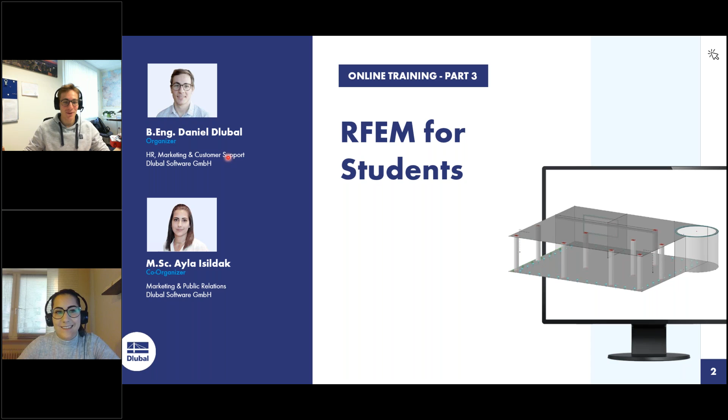So I guess we can move on, right? Yes, thank you, Ayla, for that short introduction. So let's skip to the next slide. For those who are visiting the training or this webinar for the first time, short information about GoToWebinar. We use this tool for our presentation of these trainings. First of all, here you can see you can show or hide your control panel. If you can't hear us, please adjust your audio settings, maybe adjust your speakers. And if you have any questions, you can ask them here in this text box.

And yeah, let's jump to this online training content. First of all, we model and design today a timber truss girder. The next part will be the modeling and design of a steel hall with concrete columns. And the last part of this training will be the design of a concrete building, which you see here on the right side. And these three projects we will do together. So I close my webcam. I jump to RFEM.

So now it would be interesting for me who is modeling also with me. So please put your hands up in this GoToWebinar tool. I think that should be possible, that I can see that someone is doing this. You can raise up your hands here in this GoToWebinar tool. Yeah. Some people are modeling with me, so I adapt my pace. Okay, good. Let's start with that.

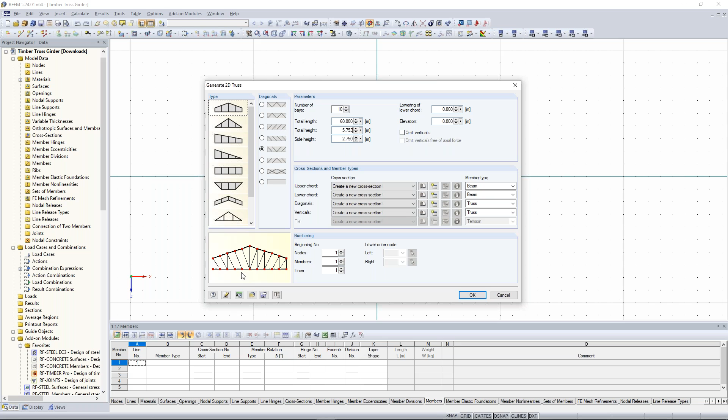My number of bays is 10, and the total length of this girder is 60 meters. And the total height at that point here in the middle is 5.75 meters. And the side height, so on the left or on the right side, is 2.75 meters. Good. Now I have to create new cross sections with the right material. So for the upper chord, for the lower chord, diagonals and verticals.

So for that, for the upper chord, I don't know the right pronunciation, sorry for that. I choose a new cross section. I think the right word is chord. So yeah, I guess so. It's chord. Okay, thank you.

Thank you, Ayla. So I create a new chord and I choose here a rectangular section because we want to create a timber chord. So I click here on that icon, and my parameters for the width is 220 millimeters, and for the height it's 520 millimeters, so 52 centimeters and 22 centimeters. Now important is that we choose here the right material, and here you see I just have the concrete and the steel, but we want to have here also a glulam timber.

So we have to create a new material, and here we create this new material when we click on this material library. So I choose here timber, and this mask jumps to the normal timber materials.

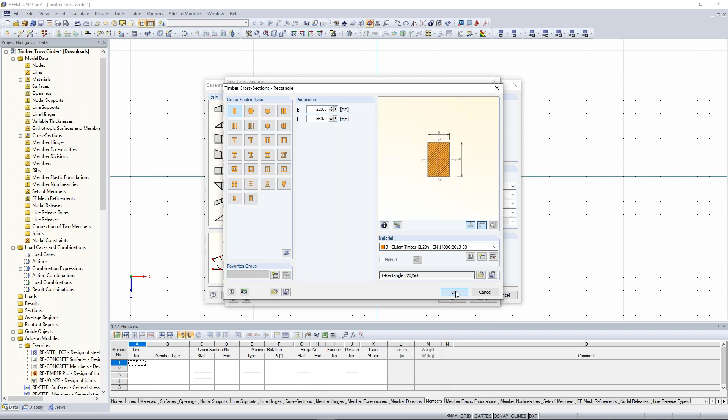And you see here the upper chord has changed to this cross section. So let's do the same thing for the lower chord, for the diagonals and verticals. For the lower chord, I choose also a cross section, but in this case 220 and 560. And material is the same. Now I can copy here this cross-section description with Control key and pressed C key. Click on OK.

And I create a new cross section for the diagonals. And now I copy here this thing and choose here the right material and change here the cross section to 200 and 200. So we have a quadratical cross section here. Click on OK. And now the same thing for the verticals. And here we have a cross section of 200 and 180. Also material glued laminated timber.

So now on the right side, you see the different member types, beam and truss. Where is the difference? Beam can transfer all typical internal forces like bending moment, normal and shear forces, and truss is a member type that has hinges on the end of a member, and therefore you can transfer only normal and shear forces, no bending moments. So keep that in mind. I click on OK, and you will see here this truss girder.

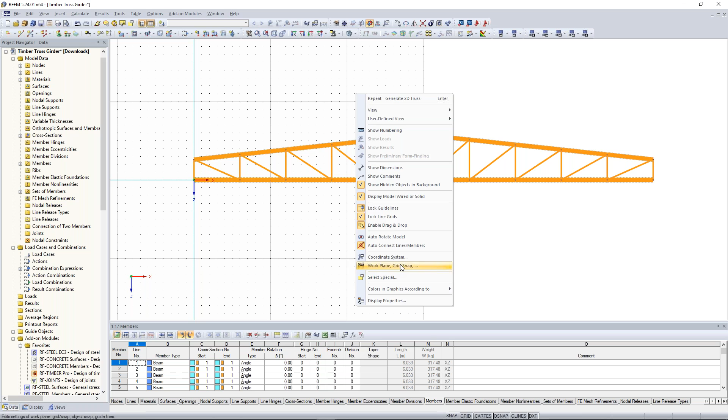So the next step is that I want to adapt my grid to the size of our model. For that I right-click, and I can choose here work plane, grid, snap. And here I have the possibility to adapt my grid according to size of model. When I click on that, you will see that the whole grid system adapts to the whole size of my model. And this makes, in my opinion, the overview of the whole model and project a lot easier.

So the next step is that we delete here the left members and the right members, because I want to create here a support, single support. So I draw a selection window from the right to the left side, and the same thing on the right side. And then I can right-click here and say delete. Now these 2 or 4 members were deleted.

And now a very important point, because I want to transfer here also some forces, that we change here these diagonals to the member type beam. So I select this diagonal, press the Control key in order to add something additional to the selection, press this diagonal, then double click with the left mouse button. And now I change the member type to beam. Good. I click on OK.

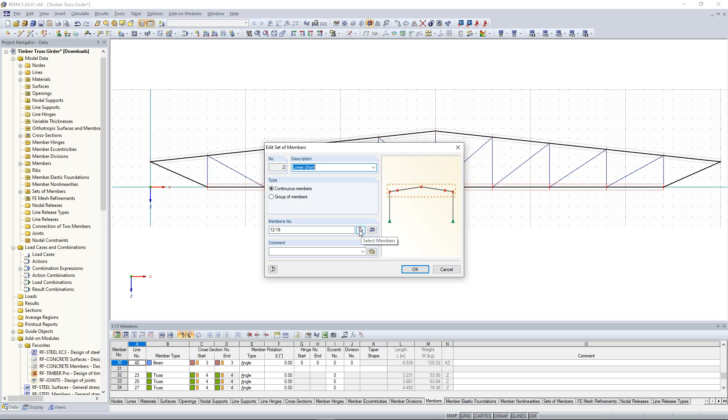And when I change here on the menu symbol bar the display model to a wireframe display model, you see here this set of members. Set of members: when you want to summarize some members, you can use the function set of members. And I want to add these members to that set of members. Therefore, I double click on this set of members, and I add here these additional diagonals. For that, I click here on this icon, select members, click on those diagonals, click on OK.

And you will see here this set of members. So you see this program created this set of members automatically by generating this 2D structure. And this will help us later when we want to add some loads.

Good. The next point is that we add here some single supports. So we select this node through this selection window, and after that we click here on the symbol bar, new nodal support, and this support should have the type hinged. And on the right side we have another support, and this should be a support which carries only vertical forces. So I move this selection here on UX away, so that we just activate the vertical forces, similar to sliding in X direction.

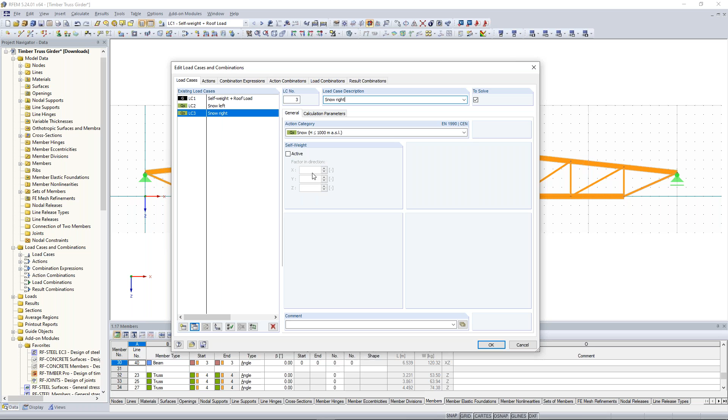And I want to consider the snow loads once on the left side and once on the right side. So for that, I click here, I enter here left. Then I can easily copy this load case by clicking copy selected load case and create new. And here I change the name from left to right. And the last load case is wind and suction, because we want to consider also a suction wind load case here on this upper chord. Okay.

Important thing is here, because we activated on this basic data at first that we want to create these load combinations automatically, several registers open here, and we have additional options. Like here for the snow, for me it's important that the acting of the snow action is simultaneous. That means that both load cases can combine with each other. So no one excludes each other. We will see that later on that load combination. I click on OK.

And now I can create here the loads. So for that, I can click here on New Member Load. And now, because we have this set of members, we can refer to them. Just click here on Sets of Members, and then the load parameter is 2.5 kilonewton per meter, and I relate to the true member length, because we have here an inclined member. So for self-weight, it's important to select here this option, global related to true member length. I click on OK.

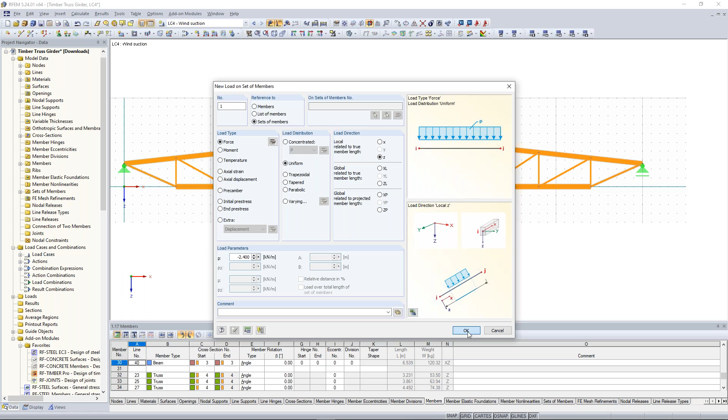Good. Next load case, wind suction. So I want to create wind loads. For that, clicking here again on member load. Again I refer to sets of members. And now an important point, I want to refer to the local axis of my members. And because we have suction loads, I have to enter a negative load parameter. The load parameter is here minus 2.4 kilonewton per meter. I click here on that upper chord and the creation of our loads is done.

When you want to know the local axis of one of these members, no problem. Right-click one of the members, select local axis system of members on, and you will see here the local axis coordinate system of the members. Good. I deactivate this again because I know my system. And now we can calculate this.

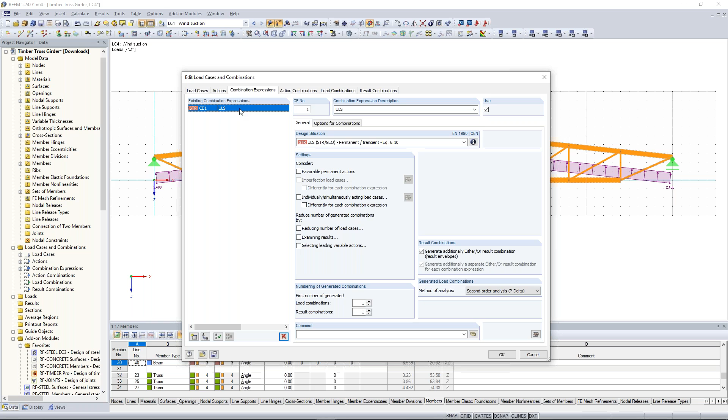And now go to the load cases and combinations again. Click here on load cases and combinations, and look for the combination expressions. Here you see the ultimate limit state and also the serviceability state. For this easy and simple design of this truss structure, I don't need these serviceability combination expressions. So I select them all by holding the Shift key and delete them. I'm just interested in the ultimate limit state because in this case it's more important.

I jump to the next register, action combinations, and here you can see the different action combinations with the leading load case, by this combination value 1.5, and here also the other leading load case. In this case, we have the wind load case as the leading load case.

The load combinations we can see here. I think this is pretty clear. And as I said before, we have activated in the register actions both load cases of snow, and this means that they can act together. And this is important to know, because when we activate here at the snow action alternatively, this would mean that both snow load cases would exclude each other. Good. I click on OK. And now I can say, okay, calculate all, please.

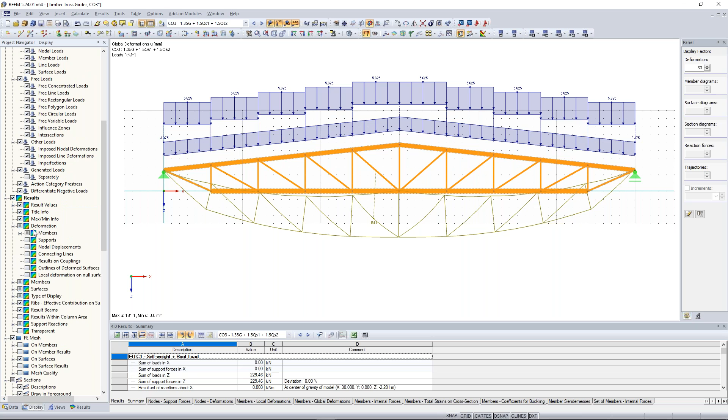And after that, let's watch the results of this girder, of this truss girder. The calculation will take some time. I think that's pretty clear. And here we can see the deformation. We can display the deformation a little bit nicer. Just click here on the display navigator, go to results, and click here on the area deformation, members, and cross-section colored. Good.

But I have more interest in the internal forces. And for me, very important, and now you can see it, the bending moments aren't so important at that truss structure. You see it here. There are some bending moments, but they are not very high. But when we look to the normal forces, they are very high. Look at that here, 900 kilonewton. This is really much. And here again, compression forces in this upper chord, 900 kilonewton. This is really much.

And I think there will be a little problem of that small member diagonal, 600 kilonewton as tension force. I think there we will have some problems, but we will see it after the design of that member in the timber design. Good. So now let's come to the design of this timber structure.

For that, I jump to the data navigator, and when you scroll down, you will see here our add-on modules. These add-on modules enable you to design almost everything according to some standards. So with the normal RFEM, you can calculate all structures, but if you want to design something, you have to use our add-on modules. And because we have here a timber structure, I have to use RF-TIMBER Pro. You will find it here, somewhere there. I can add some add-on modules as a favorite one, and they will be here. And now I click here on RF-TIMBER Pro. So this enables the design of timber structures or of timber constructions.

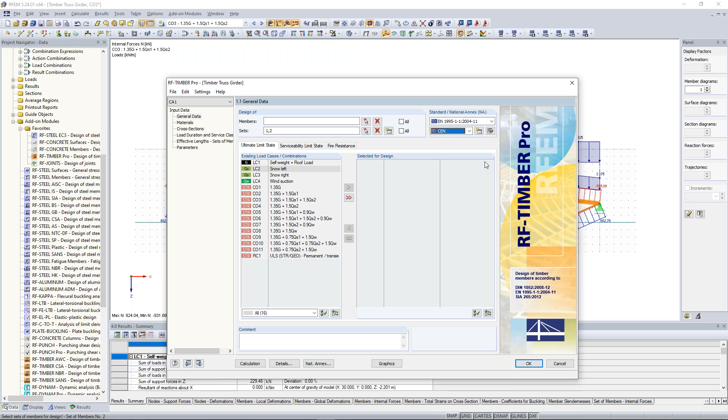If you want to see more details concerning some values here, you can see it here by clicking on that icon, and here you have some additional information of how they calculate some limits and some designs. Good. Now important, I have to select the right combinations or result combinations for my design. I decide here to design my load combinations. I choose here every load combination and transfer it to the right side. Select it for design. I just design here for the ultimate limit state. We don't need any serviceability limit state.

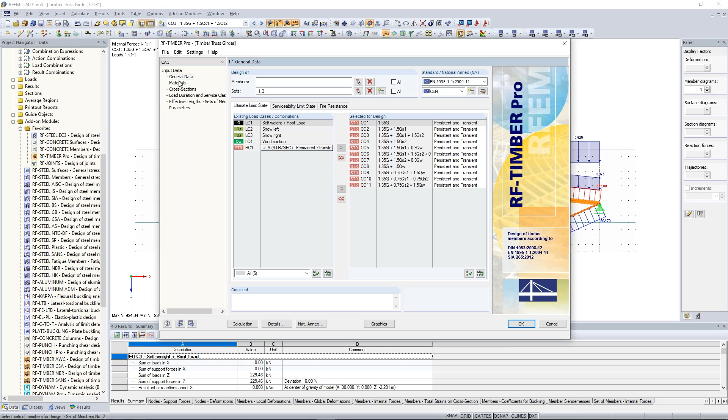Good. Now jump to the next window, and here we see the material timber for the design. Here we can see some material properties, characteristic strength for bending, for example, or for tension, compression, and so on. Let's jump to the cross sections. Here we can see some cross sections which will be used for the design. And here, additional note 7, no member with this cross section is selected for design, because we just design here the upper and the lower chord, and the verticals aren't selected for that design, because we can create here after that several cases for our design, but we do that later.

Now, important point, load duration and service class, especially for the timber design. And here we can see it. Self-weight and roof load is permanent, and our snow load cases are short-term, so the load duration class is important for the timber design. And here we have also the service class. I decide here for service class 2, and so we have here some additional information for service class 2.

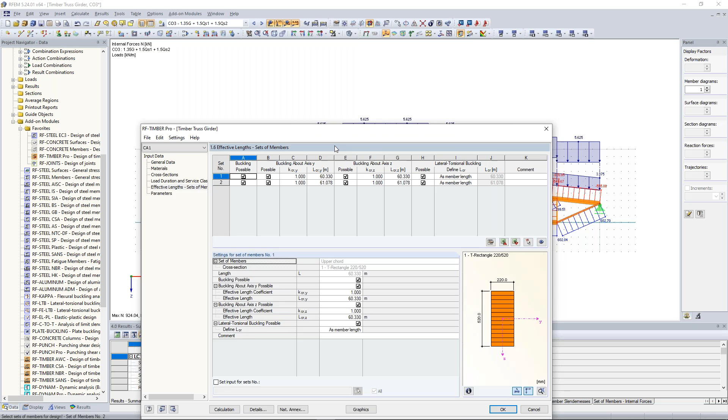And now I assume that my upper chord is fixed enough due to additional members out of the plane. So I assume that this is fixed enough, so I say that no buckling is possible for the upper chord.

And for the lower chord, you see we have just tension forces, so no stability design will be necessary, because we have to consider stability only if we have compression forces. The only compression forces you will see here in this upper chord. So for tension forces, we don't need to consider any buckling or torsional buckling, so I don't select here anything.

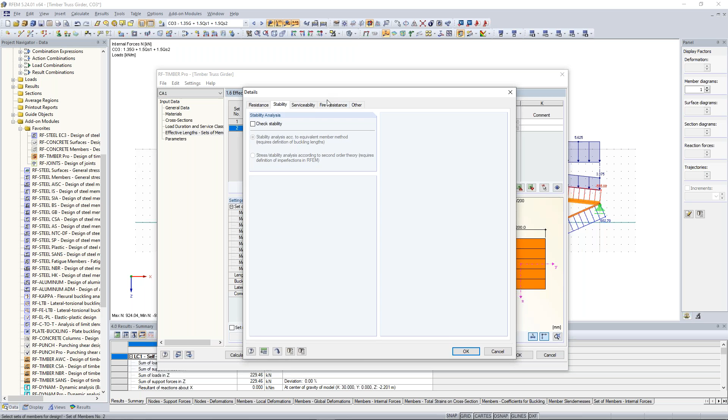I can do the same thing when I click here on details. And when I jump to the stability register, I can say, okay, please don't consider any stability because I know my upper and my lower chord are fixed enough, or the stability wouldn't be important here. Same solution.

Parameters, I can add additional parameters here, but in this case this isn't so important. So how can I calculate this?

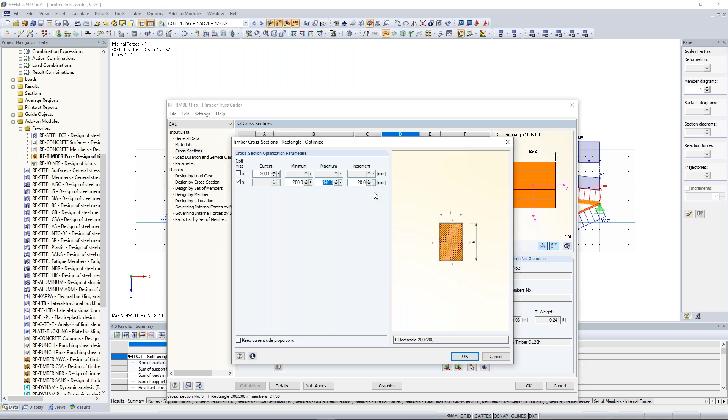And now you can say what you want to optimize. I want to optimize the height of this cross section, so I click here on height. The width should be the same, just the height. And I know the height can start at the minimum of 200 and the maximum of this height should be 440, and the increment of these steps should be 20 millimeters.

I click on OK, then I click again on the calculation, and now you see the designs are good enough. At that moment, the design ratio of the new cross section is 200/220.

Good. Now it's important that you transfer also this new cross section to export it to RFEM. Export cross section to RFEM, click yes, because now it's important to calculate the whole structure in RFEM again, since we have new stiffness here. So calculate everything again.

Okay, now let's go to the results of our add-on module, RF Timber Pro. And here we can see the max design ratio is 0.99. This is very good.

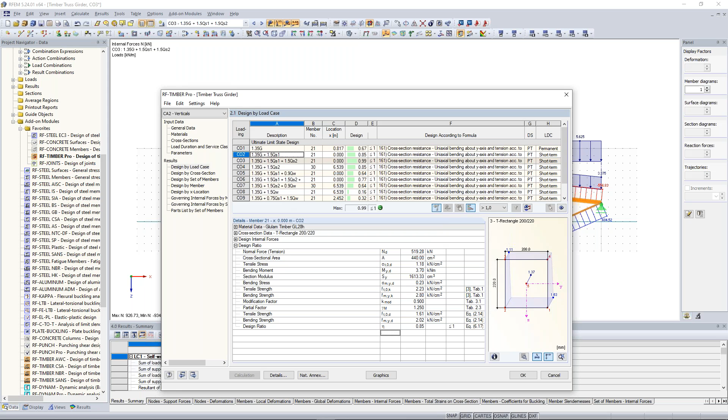I select the members for the design, and now I can click here every vertical manually, or use a smoother way of selection. Here in the symbol bar, I have the option to select special objects in RFEM. I click on that, and now I choose here, I activate this member.

Scroll down and say okay, parallel to member. Now I choose this one member, click OK, and you will see all members are selected parallel to that first member. I click OK, and these selected members were transferred here to that part. So again, I choose here my load cases for the design.

I go to materials. I think this is now pretty clear. Cross sections and so on. Effective lengths. Oh sorry, here I have to select the service class to 2.

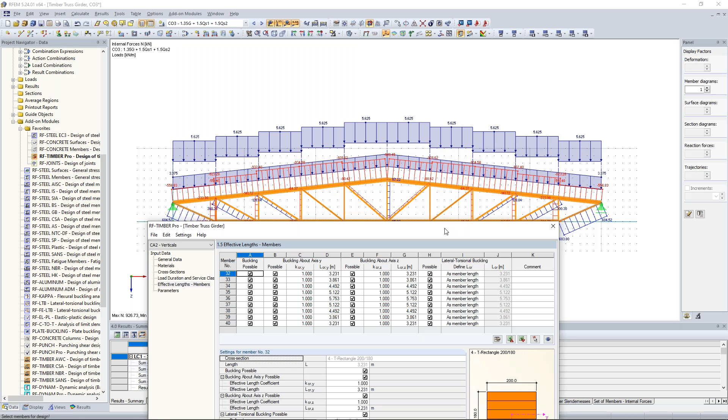Yeah, also for the lateral torsional buckling, so the inputs of this length are enough, and I can say okay, calculate. And again I see, okay, all designs are fulfilled. Good.

Now the last case is the design of the diagonals. So new case, diagonals. Click on OK. And again I choose here the right members for the design, and I want to design here this member, the diagonals. Now it's, as you can see, a little bit hard to select them because clicking at the same time is a little bit hard.

So I use here my view navigator, and I want to display them by different cross-section types. So members by cross-section. And now I decide here for the T rectangle, 200 by 220, and I choose here these members. Click on OK.

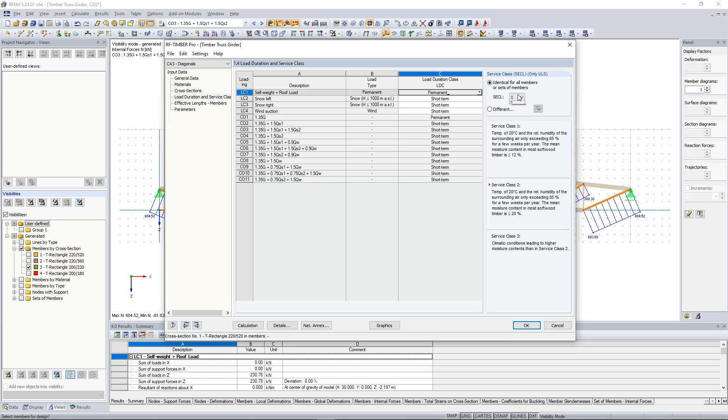Jump to the next window, materials. I think here is pretty everything clear. Cross section, also here is everything correct. Load duration class, yeah, the same things here again. Maybe the service class, change here to 2.

Effective lengths. Again I suppose here the member length as the buckling length, because I say okay, out of plane and in plane should be the same as the member length, because I suppose here this Euler case 2, and I say calculation, and all proofs are fulfilled, are correct under the design ratio of 1.

And yeah, this was the very easy design of this timber truss structure. We can also watch the different design ratios graphically.

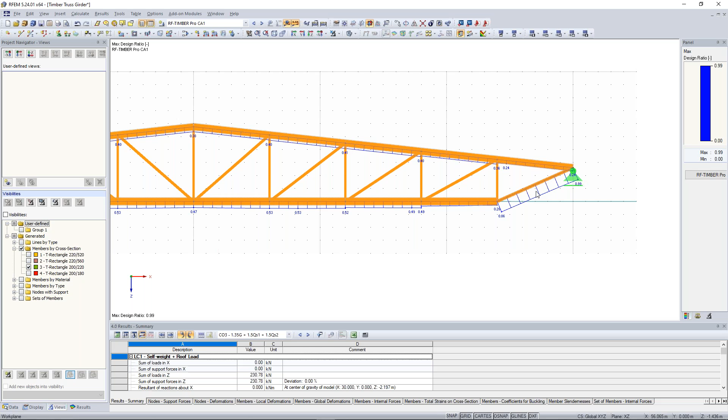So I click here to RF Timber, and here we can see the different design ratios. And yeah, as we supposed correctly, this diagonal here on the left and here on the right side has a very high design ratio in comparison to this normal lower chord. But I think that's pretty clear because here we have a smaller cross section, like here on this upper chord.

Jump to the next design case. So the verticals, and here the diagonals. Yeah, this was the design of this timber truss structure.

Good. Ayla, any questions or anything to show? What would be good? No, I think everything is fine and nothing special.

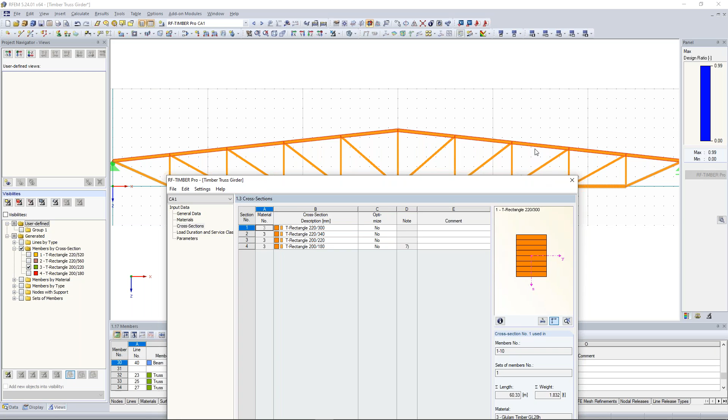Yeah, this is something you have to consider when you do this design, because when I say here okay, export all cross sections to RFEM, and I say yes, you will get higher deformations because now our structure is thinner, I would say. Yeah, you have smaller cross sections, so it's not so stiff as before, and you will pretty surely get higher deformation. Yeah, let's look at the deformation, maybe on that load case. What's that? Maybe this would be more interesting when you have just vertical loads.

And I remember that we have a deformation of 180 millimeters. And now we will get deformations of 260 millimeters, so 8 centimeters more. I don't know, this is also something you have to consider in your design.

Good. Anything else, Ayla? Not yet, no. Okay, we have one new question. Is it possible to have multiple sections for each member?

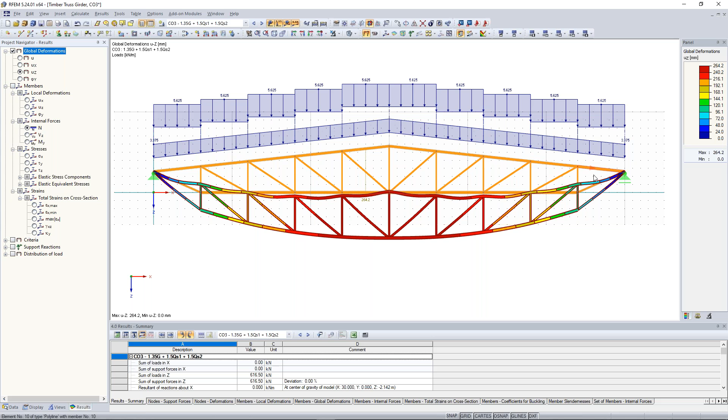Yeah, that's possible, but you have to create more cross sections for different members and put them into the design. So I can, but we almost did here the same thing. We designed here for the upper chord a different cross section, for the lower chord a different cross section, for the verticals maybe you can optimize your construction.

For the verticals and the diagonals, because here you will get more tension forces. So you can say, okay, the first 2 rows of this diagonal can be a different cross section and put them then to the design.

But consider also the production in the factories of this structure. When you say please do every cross section different, the factory of this structure will say wouldn't it be more economically when we have similar cross sections? Yeah, this is possible, but also consider the production and manufacturing of this truss structure.

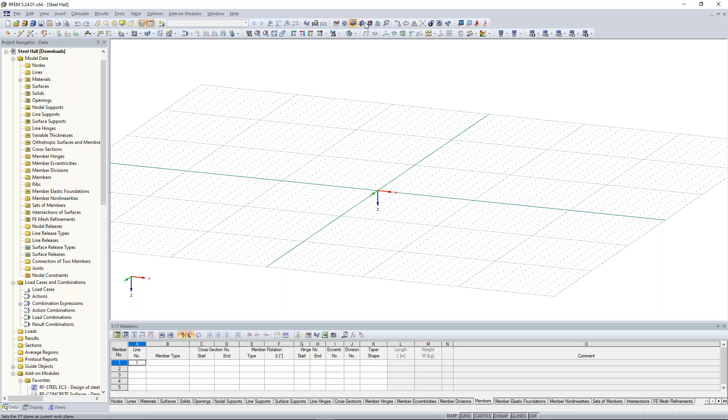Again, here we have the model type 3D. So we have here in that symbol bar, you can see it here, 3 different work planes. Now I click here on the work plane XZ because first of all, I want to create a 2D truss structure. Again, as before, click here on the menu bar, tools, go to generate models, members, and click here on 2D truss.

Yeah, now we have to create new cross sections, but I think that's known by now how this works. So I create new cross sections. The upper chord has a cross section of HEA 300. So here, click here, import rolled cross sections, HEA 300. And you see here the cross section description.

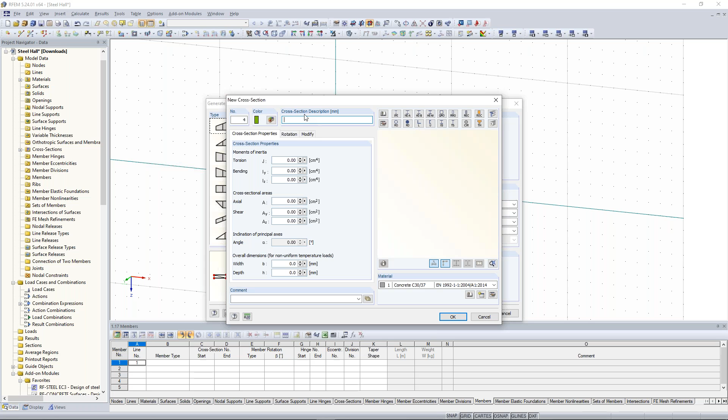And the verticals are HEA 160. Good. I click on OK.

And the next part is that I change these outer diagonals because I'm pretty sure that they will get more internal forces, especially normal forces. Therefore, I change here the cross section. I select them, double click on one of them.

And here I change the cross section to HEA 140. I choose here the right material, and click on OK.

Good. So now we have different types of cross sections. We can display them a little bit nicer. I can show you how it works. When you go to the display navigator and scroll down, you have here the possibility that you can color the graphics according to the cross section. And here we can see the different cross sections by different colors.

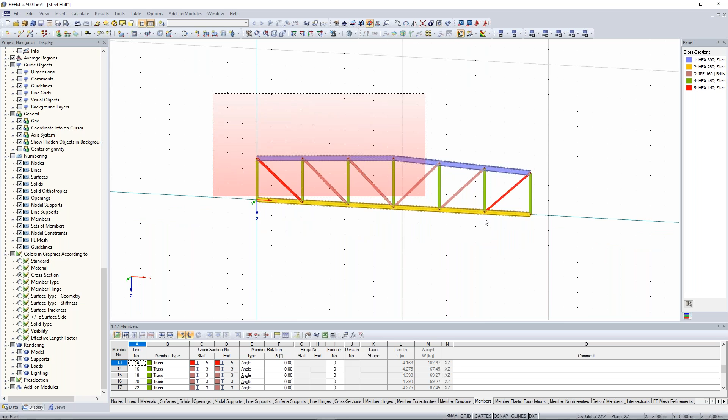Good. So next step is moving this truss 8 meters along the z-axis upwards. So select everything, right click, click here, move or copy. I just want to move it 8 meters high, so I don't have to enter here the number of copies. Displacement vector, remember our global z-axis is downwards, so when I want to move it upwards, I have to enter a negative value, -8.

So, the next part is that I delete these outer verticals because I want to connect a concrete column here. So I delete this outer member. Now I create a new column. For that, I click on the symbol bar, new single member.

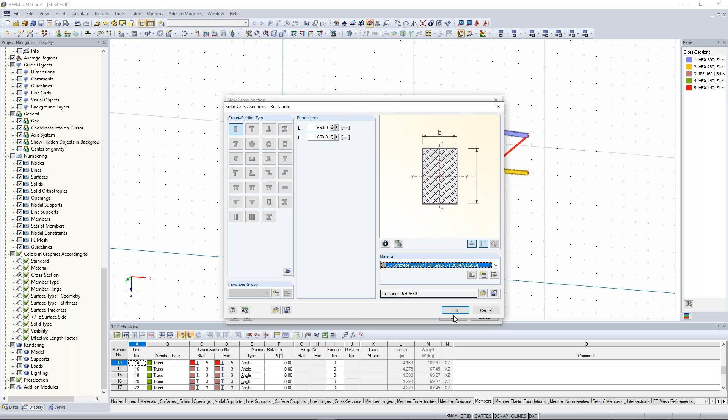I create a new cross section, rectangle and quadratic cross section, concrete C30/37 according to the Eurocode. I click on OK. Again on OK. And I start from the bottom to this corner node of this truss structure.

Now you can see I can't snap to these grid points because I didn't activate this. Here on the status bar, you can activate snap to grid. Now it's activated and I can snap to these grid points. Good.

Now I copy it easily by drag and drop by pressing the Control key on my keyboard. And because in this case they have the same colors, I change the color of my concrete structure to pink. So, nice. Good.

The next part is that I adjust some hinges. We offer two ways of inserting hinges. The first, and maybe this is not so well known, is that we can add hinges graphically. Therefore, go to the menu bar, Insert, Model Data, then Member Hinge, and then Assign to Members Graphically.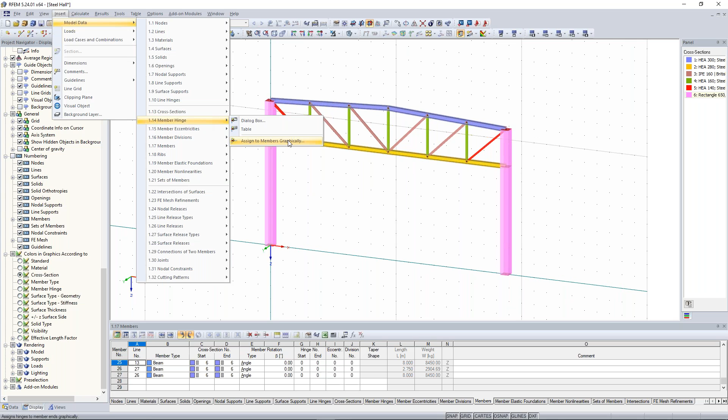As you can see, I want to connect this upper chord by a moment hinge on that concrete column. Therefore, I create a new hinge type and I activate the moment hinges. I can also do it by clicking on one of these icons, set rotational release MY and MZ. It's the same solution.

I click on OK, and now you will see blue nodes or circles. When I click in the middle of one of these members, the hinge will be created on both ends. And when I just click on one of the member ends, it will create the member hinge just at the end of this member. I do it on the left side and once on the right side. Click on OK.

I change the display model to the wireframe model, and you will see the hinges a little bit better. And the same thing we do for the upper chord. The other way of adding member hinges is to double-click one of the members and adjust the member hinge there.

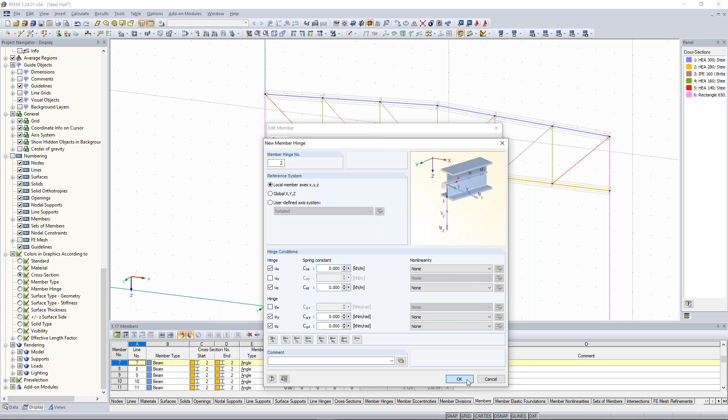And after the calculation, we can see that the tension forces in that upper chord are transferred through that diagonal into that column. Because when we have tension forces, this tension force will go along this diagonal and will be transferred as a compression force to this concrete column. I think that's pretty clear.

Then the right member. And here the same hinge, but at the end. Good.

The next part is that we check the self-weight of the structure and watch the internal forces, to see if this frame is modeled correctly. So for that, I also choose the lower nodes because we want to create some supports now. We have a rigid support here. This enables all moments and vertical and horizontal reaction forces.

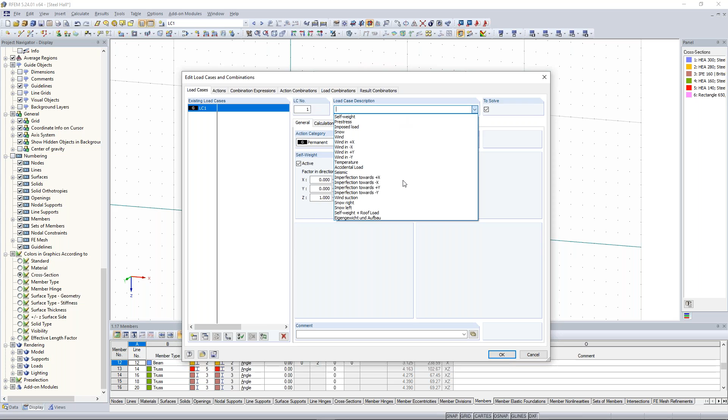Now I create a new load case. Self-weight, and I just activate the self-weight, click on OK. And now I want to see the results.

So, okay, here we see at first the deformation, but for me more important are the internal forces, to check if we modeled and entered the hinges correctly. So for that, I activate the internal forces. And here we can see it. Tension forces, because we have positive normal forces. Compression forces, yeah, simple truss structure. I think that's pretty clear.

And here we can also see that this tension force is transported through that diagonal into that concrete column. And now let's watch the shear forces. And here we can see at this hinge we have no additional tension forces, no normal forces. The same with the shear forces, you can see 0. And bending moments, again the same, 0 bending moment. On the right side the same.

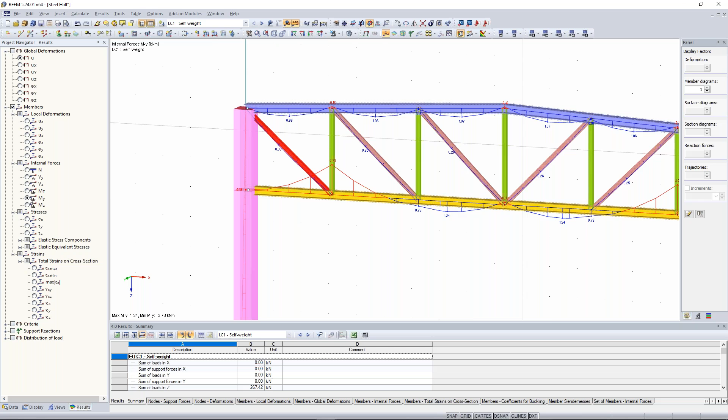Good. So I think we modeled it correctly. So let's continue with the other frames. Again, I want to adapt my work plane according to the size of my model. Now I want to copy it 2 times in the global Y direction. So I select everything, right click, move and copy. Number of copies is set to 2 and my displacement vector is in the global Y direction 9.5 meters.

Good. I change to the work plane XY. And now I want to add additional beams. Let's do that. New single member. And they get a new cross section, HEA 240. Material steel.

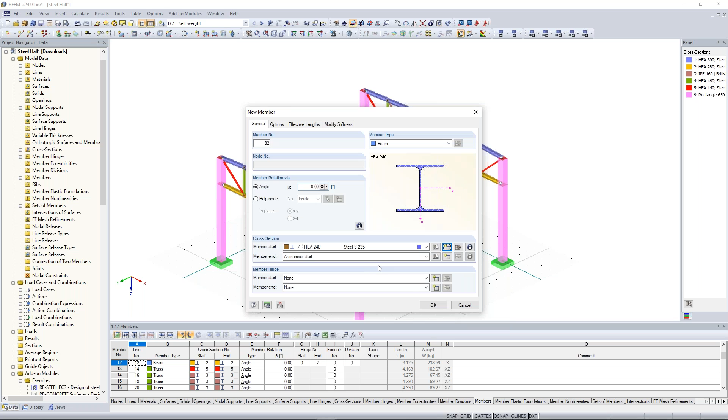And now I want to add some hinges on both ends, so they will be connected as a hinged beam, as a truss, we can say, because we have moment hinges on both ends. Okay, so let's do that. So, good. And the other nodes will also get new beams.

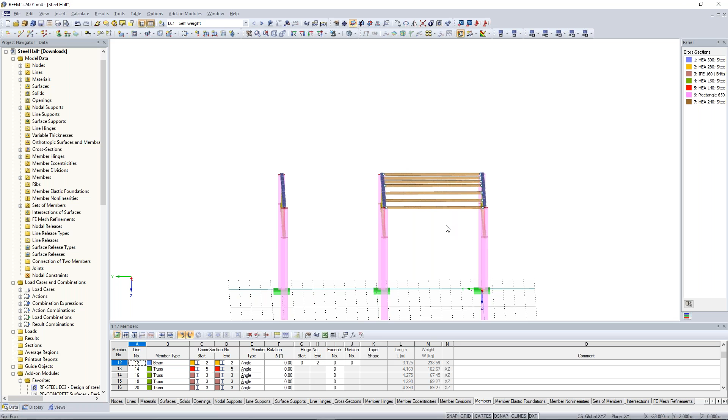For that, we create a new hinge. The member start should also have a new moment hinge, and at the end we can leave it as none because here we do another member hinge. So, very easy. So now I want to copy those beams. I press the control key on my keyboard, select everything, and by drag and drop I can easily copy it.

Good. Now I want to create scissor hinges at those beams. What are scissor hinges? Scissor hinges are when you have four members connected, like here: 1, 2, 3, 4 members connected in one node. I can consider scissor hinges, and each of the two member pairs transfers moments in its continuous member direction, but they do not transfer any moments to the other pair. So I only want to transfer shear forces to that beam.

So when this continuous beam gets some loads, it will have a moment distribution, something like that: a support moment and a field moment, and I want to transfer only shear forces to that beam, to that upper chord. So I have to create scissor hinges. Let's do that. For that, I choose these members. Member end should be a new cross section. Sorry.

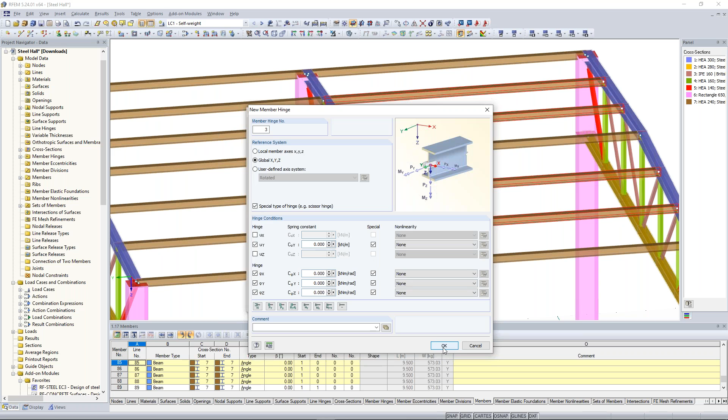And a scissor hinge can only be created in my global coordinate system. And here I have to activate the special type of hinge. I want to consider the transfer of moments in my continuous direction, so I have to activate the bending moments, and I don't want to transfer any normal forces. Important thing, I have to activate the UY direction, because I refer to my global system. I have to activate the scissor hinge, and also one torsional hinge, because I don't want any torsional moments in my beams. I click on OK, and you will see this S for scissor hinge, and we will do the same for the other side.

But here, member start, I choose the global system. So here we have these member scissor hinges, and for the end of these beams we also create a new type of member hinge. Right click, member, edit, and here we create for the end these kinds of hinges in order not to get any additional forces or moments. Good. Okay, so let's calculate this to see if we modeled everything correctly.

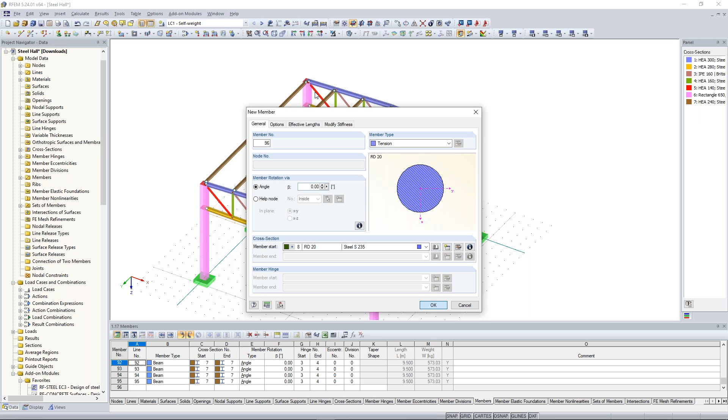Maybe one note: I forgot some bracings. We can also create some bracings here. Just click on new single member. Change the member type to tension. I choose a round cross section with a diameter of 20 millimeters. Click on OK. And create these truss beams. So, good. Now let's calculate this. It takes some time.

And let's look at the internal forces. Maybe using the internal forces I can explain the scissor hinges again. I choose these 4 members. As you can see, here we have our continuous beam, and here we also have a beam. With the scissor hinge I said, please create a scissor hinge so that I transfer only my shear forces, my vertical forces, to that beam in this direction, to the blue beam. Everything else should be considered in the continuous beam. And you can see no moment was transferred to the other beam.

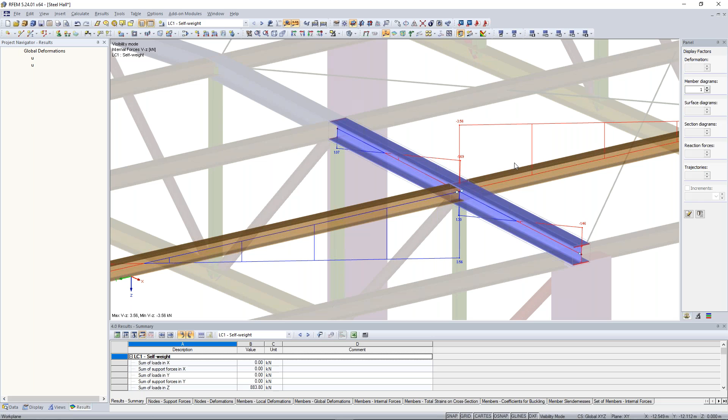When we look at the shear forces, here we can see additional shear forces from that continuous beam. And this is something important to know for the scissor hinges. Okay, good.

Yeah, now I want to show you one additional information. When we look here, maybe to that beam, we see here the distribution of that bending moment. And maybe you think, okay, this isn't correct because it has this distribution. This would mean that we have here a single force in the middle of this beam. Normally we have just the self weight, so it should be a quadratic distribution of that moment.

When we change here on the calculation parameters the number of divisions of members for the result diagrams, maybe to 30, we will get the right distribution. Let's calculate this again. Oh, now I calculate every load case. Doesn't matter. Now you see the right distribution of the moment.

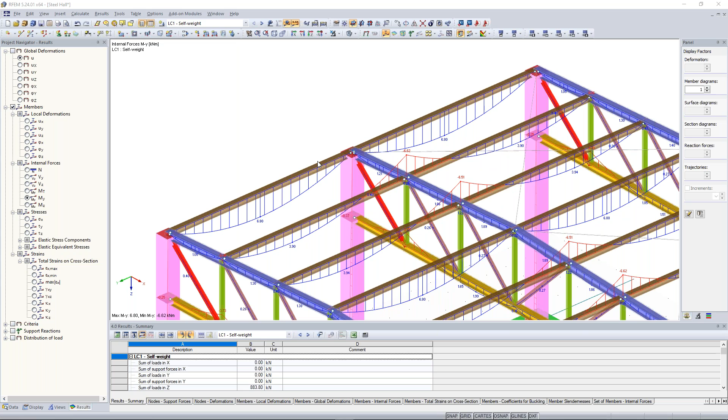Yeah. So when you think, okay, the distribution of one of my systems isn't correct because it has the wrong distribution, then please check here on the calculation parameters the right divisions of members for the result diagram. Okay, good. Now let's come to the load cases and loads.

Maybe before I do that, I forgot to mention that here at the calculation parameters, you have the possibility to check the deformation of failing members, especially when you have nonlinear member types. And we have nonlinear member types because we have here these tension member types for the bracings. You can handle them when they fail, that they should be removed individually during the successive iterations.

Yeah, this is maybe one important point when you have some systems or some models which have some instabilities. Then you can check here for that additional option and activate this, and maybe your model will calculate then. Okay, good. Now let's come to the load cases.

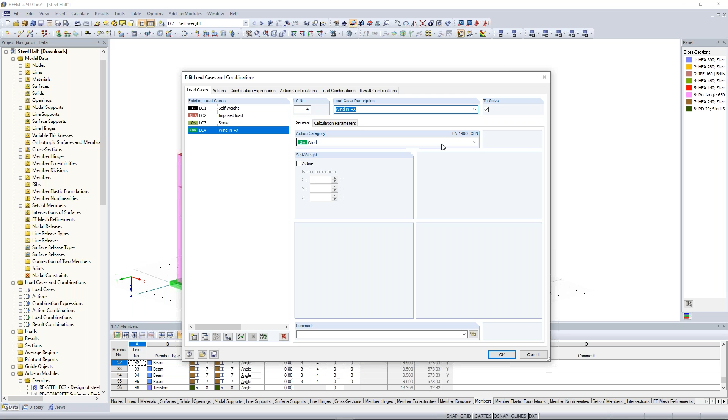I click here on new load case. I create here a new load case, imposed load for the category A, then a new load case, snow, and the last load case, wind in the positive X direction. Again, let's take a look to the actions, imposed, snow, and other things, combination expressions.

I just want to consider here again the ultimate limit state, so I remove this serviceability, action combinations, and load combinations. This will be done automatically because we had set them before here in the basic data of our model. Click on OK. And now we add the loads on our structure.

I choose here the right load case, and I want to add here some loads on that roof plane. For that, I go here to Tools, Generate Loads from Area Loads on Members via Plane. So in that case, first of all, I relate to my true area because I have now the self weight. The magnitude is 0.5 kilonewton per square meter, and now I choose the corner nodes so that I can get the boundary of my area load plane. Click on OK.

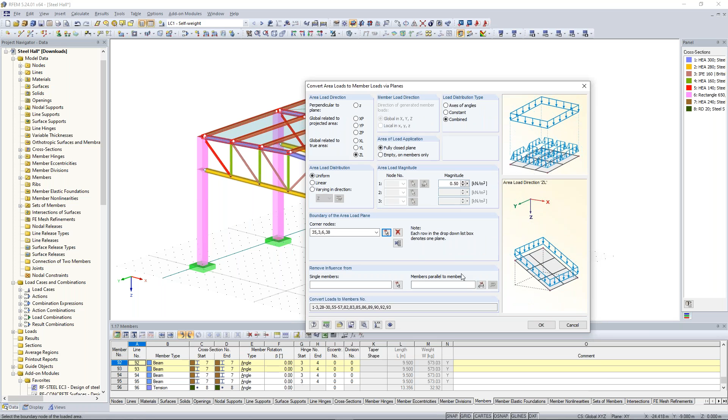Now I can remove the influence of members, and as you can see here on the work plane, at that moment everything is selected, also the upper chord, but I just want to consider the loads on the continuous beams, not on the upper chord. So I say remove the influence from members parallel to the upper chord. And you will see now just these members are selected. Click on OK, and let's do the same thing then for the right side.

So again, click on Tools, Generate Loads, and here we can see it's the corner nodes from the last time. So if you create the new plane again, it has the same corner nodes, so you have to delete these nodes. So I click here, delete current area plane. Now select the new corners. Click on OK. And now we say again, parallel to this upper chord, and click on OK.

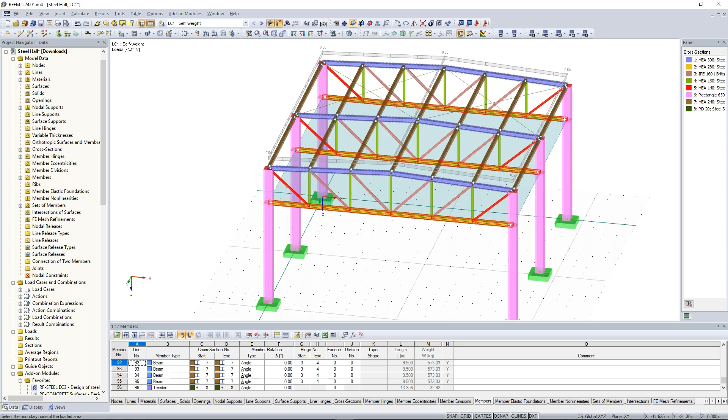So now let's do this here also for that plane. Generate loads from area via plane. And here we have the same magnitude. I choose here the right nodes and click on OK. So as we can see, here we have an information box about the generation of the loads. Click on OK. And when we right click on display separately, we can see how the loads were added on our members.

Good. Now jump to the next load case, imposed loads. Click on generate loads again. And now it is our big advantage that RFEM remembered our last input of our corner nodes, because now I can say, okay, please add here the same magnitude. Click on OK. And we have here the same input of our load case imposed loads.

Good. Next load case, the snow load. Here I choose also my tools, generate loads, not from area loads on members via plane, but we have also the possibility from snow loads on dual pitch roof. And here I choose the zone number. So first of all, I have to choose the right national annex. I decide for Germany because we are located in Germany.

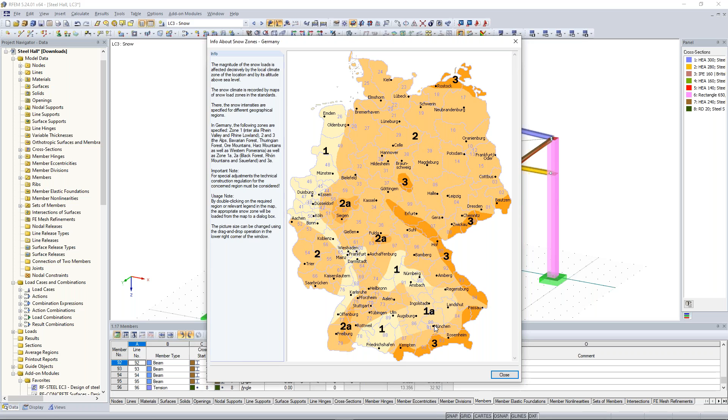I choose here the right information zone. In this case, I choose here Munich. I double click. The altitude is set to 550 meter. And now it's important to choose the roof geometry correctly. So in the right order, you see A, B, C, D, and so on. So clicking in the right order, C, D, E, F.

And here we can see the new load case which will be generated in this load case. I want to remove some influence because, as you can see here, I just want to have my snow loads on these beams here. Members parallel to that upper chord, and click on OK.

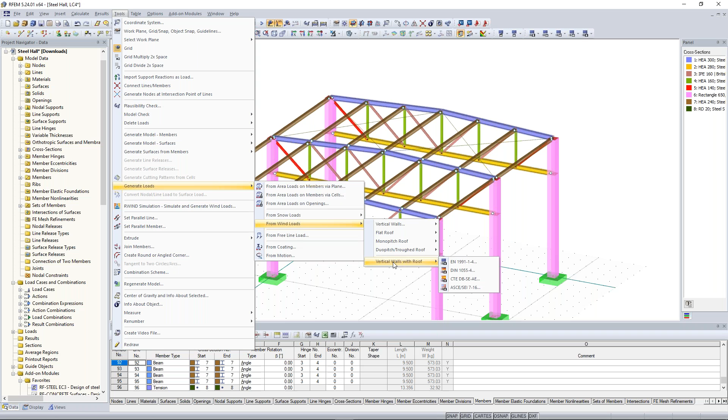Good. Now let's do the same thing for the wind loads. For that, jump to the next load case, wind in positive X direction. Click on Tools, Generate Loads, Wind Loads. And here we have also the possibility to generate the wind loads on vertical walls with roof. I decide for according to the Eurocode. Again, for the national annex, we have also the possibility to consider other national annexes. Wind zone here, I choose Munich, category 2, because I have maybe a little bit higher buildings in a bigger city.

Again, here I choose the right base geometry. Now it's important that you do the base geometry in the right order as the roof type and geometry. So start here again on the left lower corner, and when you want to select the roof type, you have to start at the same left upper corner, as you can see it here in the right bitmap. So let's do this. And here the same.

And because we have a very flat roof, the program will say to me that it will consider it as a flat roof for the wind pressures. And now we have the wind load case, wind in the positive X direction. So I say also that the wind should have the same side like the wind in positive X. So I delete here these members because I want to show how it works. First of all, you can see here every member is selected.

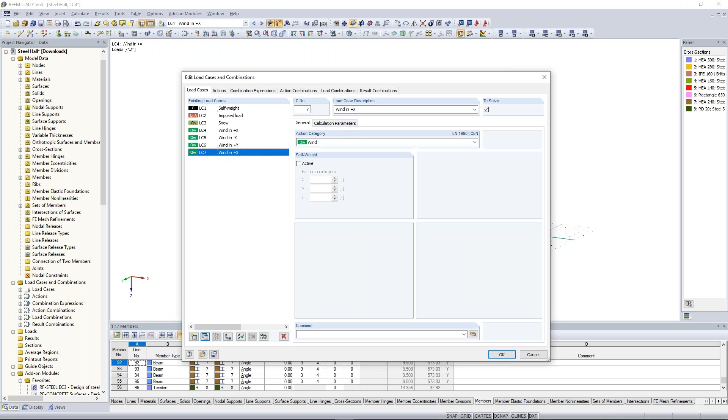And now we want to consider these wind loads also in the other directions. And because we have already generated these loads, we can easily copy this information to the next wind load cases. So let's go to edit cases and combinations here in the symbol bar and click on load case 4, wind in positive X, and now we can easily copy it 3 times, because now we want to consider the wind loads in every direction. So wind in -X, wind in positive Y direction, and in negative Y. Click on OK.

And the only thing we have to modify is the direction of our wind generation tool. So double click on the generated wind loads and choose here the right side. And in this case, it's the negative X direction. So DE. And you will see how it turns to the right direction. And the same thing we do for the other locations for the Y direction. So positive Y, we need the side AFE or EFA. And let's do the same thing for the other side, the minus Y direction.

So BCD. Okay. Good. So let's calculate everything. This will take some time. I drink some water during that calculation time.

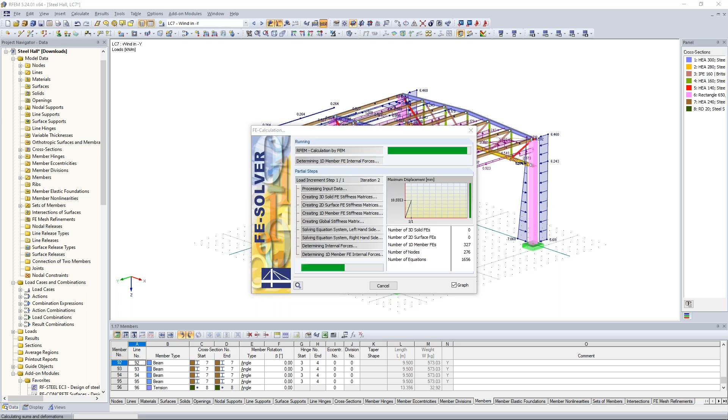Good. Okay, now we have a problem because in some cases our model is unstable. And this, I think it can be because of these hinges here. I have to correct them because I think I have here the wrong hinges. Let's correct them. Okay, let's calculate that again.

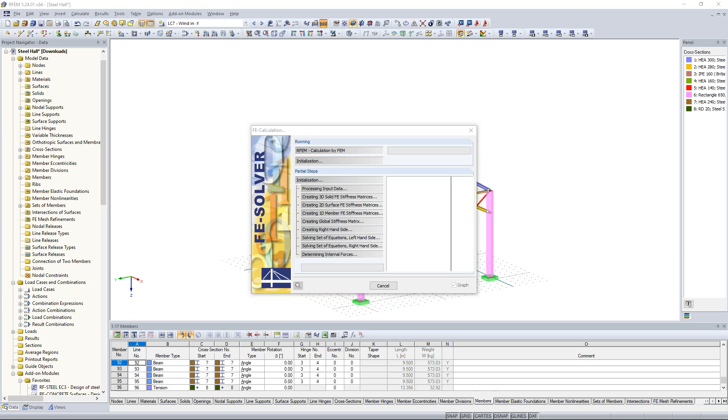And now it was calculated correctly. The reason was because I had here the wrong member hinges. Sorry for that, but now I think everything is correct. Good. Now let's come to the explanation of the results. I would recommend you to do some plausibility checks. So look to the internal forces, look to the deformations. Can this be right? And so on.

So load case 1, self-weight. Can this be correct? So, okay, member hinges, I think that's pretty clear. So there are places where we have member hinges. The bending moment should be 0. Here we have these scissor hinges. So with this support moment, field moments. Also our supports, they can act on some moments. I think that's pretty clear.

Let's watch the deformation in UZ. Can this be correct? I think, yeah. Good. And so on. So when you do some plausibility checks, look to the deformations, look to the internal forces, and so on. Also to the support reactions, and so on. So let's do the steel design.

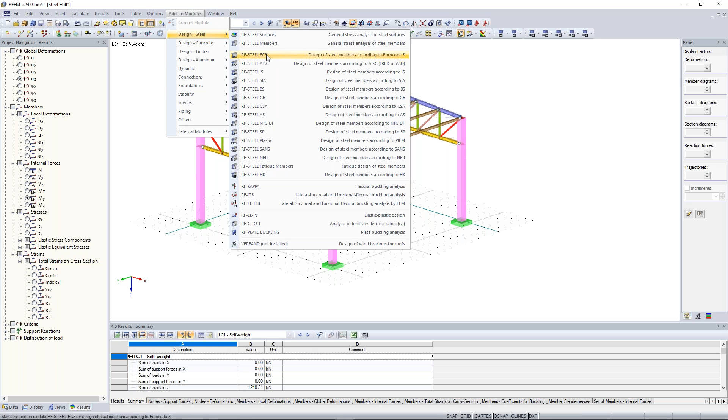For the steel design, we can use our add-on module RF-STEEL Eurocode 3. So let's open our add-on modules, design steel, and here we find RF-STEEL EC3, so Eurocode. Here we can design steel members according to Eurocode 3. Let's click on that. And similar to our further add-on module RF-TIMBER Pro, we can design different members and sets of members.

First of all, I want to design all steel cross-sections, but just a design of cross-sections, no stability design. So I choose here all members, but all steel members. So I go to the view navigator, click here on members by material, and activate just the steel material. Now I draw a selection window, click on OK, and I refer to the normal Eurocode.

When you want to see some more information about some values, you can click here on this button, and you will get some more information about different types of proofs, like here the general method when you want to make a stability design, or serviceability when you want to prove the deflections, and so on, the partial factors. Good. I want to consider my result combinations, so the combination of all results of the load combinations.

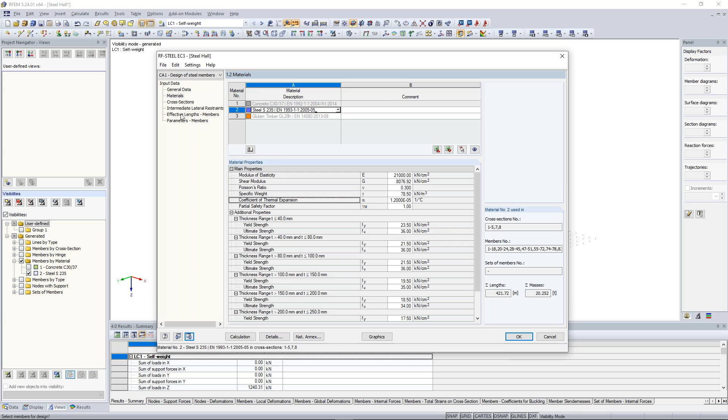Now I jump to the next material. Here we can see different material properties, cross sections, and so on. And also here some intermediate lateral restraints. So when you have some additional members which fix maybe some beams, you can add here some lateral restraints.

And also here, important for the stability design, effective lengths, you can set here the correct buckling lengths, and also the right lateral torsional, difficult word, also the right lengths for that proof. But as I said before, for that case, we want to do only a cross-section design. So not stability. We can rename this case, so just design of cross sections.

And let's go to the details and deactivate here the stability analysis. Click on OK, and now watch these two windows on the left side. They will disappear because now we are just focusing on the cross-section design. I click here on calculation, and all members will be designed. And we can see here, okay, everything is good. So the cross sections are good enough.

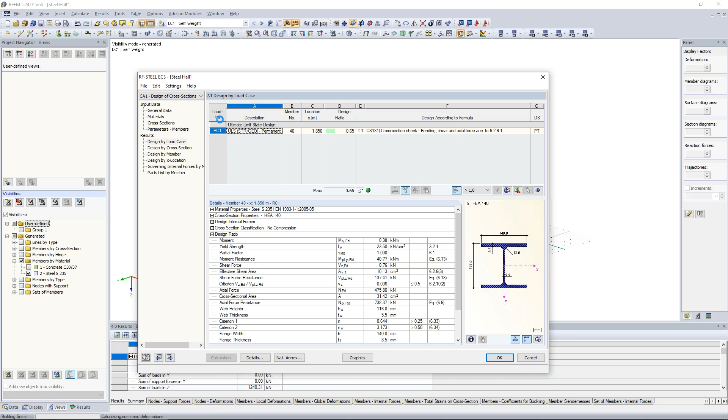Yeah, good. And now the next check is the stability analysis. And for that, we have to create a new case. So, now I have a small problem. Sorry for that.

Now I go back to my add-on module RF-STEEL. And now I want to do a stability analysis of the upper chord of my truss girder structure here. So I create a new case, stability analysis of upper chord.

I choose here the set of member because through the generation of our 2D truss, the upper chord was set automatically to a set of member. I click OK, and now I have to choose the right result combination.

Let's jump to this window, nodal supports for the set of member. We can see our set of member, and if we want to perform a stability analysis, we have to define the right supports at those nodes. Let's click on show figure or rendering, local coordinate system, and here we can see these supports, for the stability analysis, especially buckling and lateral torsional buckling analysis. Let's calculate this and see if it works.

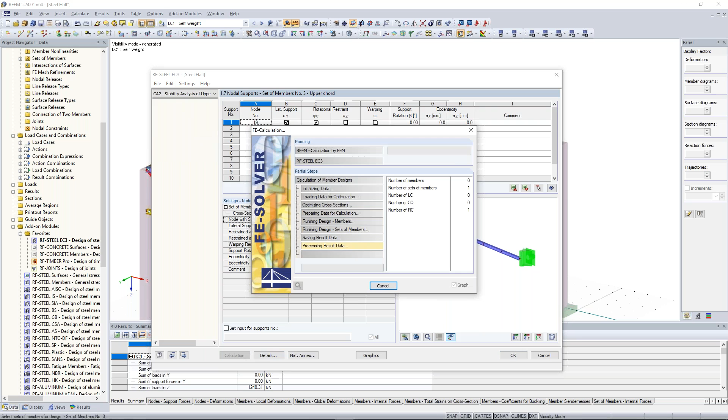Now we can see this is not possible, non-designable, because when you look at the design, it's not good enough - we forgot to add an additional support at the middle of our upper chord. So we have to add an additional support for our proof of stability.

Now I want to add here in the middle of this upper chord of this set of member an additional support. For that, I click on that node, choose it from the model, and say okay, let's add an additional support here, but I don't want to activate any rotational restraint, just a horizontal support, so a lateral support. I calculate it again.

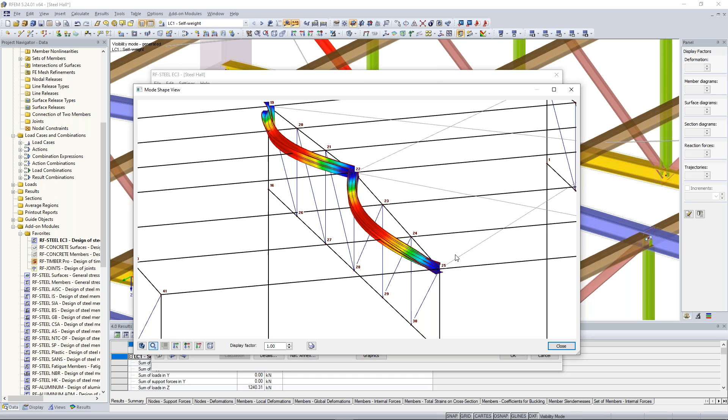Here we can see the eigenform. Here we activated the supports, as you can see - here just the lateral support, so just horizontal support, and here also the fixed support. This is very interesting to see how this will deform.

Okay, this was the design, the very easy design of this steel hall. So what we have done: we did a cross-section design and then a stability analysis of our upper chord.

Ayla, any questions or anything to mention from your side? No, I don't think so right now. But again, if you have any questions, you can write in the chat.

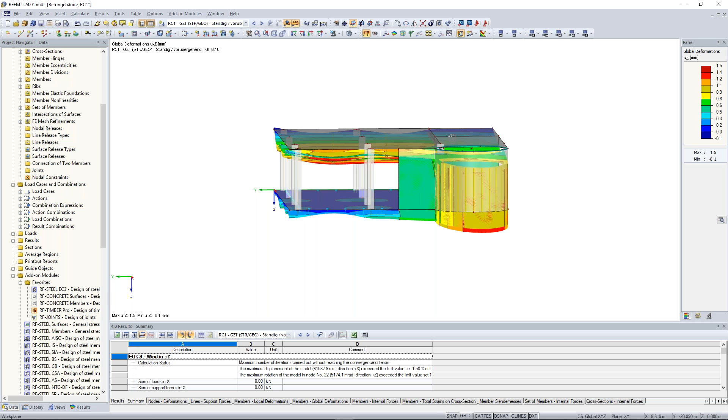Maybe you can remember this was the model we modeled together in the second part of our online training for students. Now we do the design of these concrete surfaces, of these columns, and also of this downstand beam here. So let's do this for our slabs.

For that, we can use our add-on module RF Concrete Surfaces, for the design of concrete surfaces. You will find these add-on modules also here on the menu bar: Design Concrete, RF Concrete Surfaces. Let's click on that.

What we can see here in this window: we select first of all the result combination, and then the right standard. We want to design here for the ultimate limit state according to the Eurocode, so no German national annex. For more information, you can edit parameters here, but I think the presettings are pretty good for this first proof of concrete surfaces.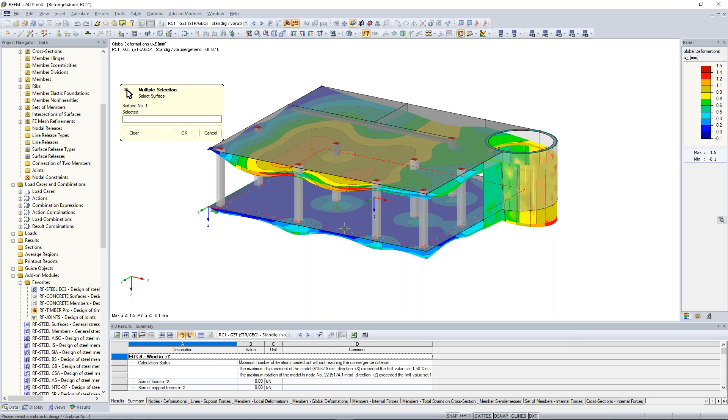And now let's jump to the reinforcement. This reinforcement window contains 5 tabs that control the reinforcement parameters. We define 2 reinforcement groups. The first reinforcement group will be slabs. Therefore, we choose the right surfaces - we choose the bottom plate and also the upper slab.

And the next part is here, reinforcement ratios. I think the presets are pretty good, so you don't have to modify something there. Reinforcement layout - here you can adjust some additional things.

For example, the concrete cover for reinforcement, you can do that according to a standard. When you click here on edit, you see this exposure class according to the standard, where we can get more information. But because we're doing a very easy design here, I don't need to consider this, so I leave the values here as the new values. I think that's pretty clear.

Here the reinforcement directions - once in the horizontal direction, then in the vertical direction. I think that's pretty clear. When you have different geometries of slabs, you can adjust the directions here.

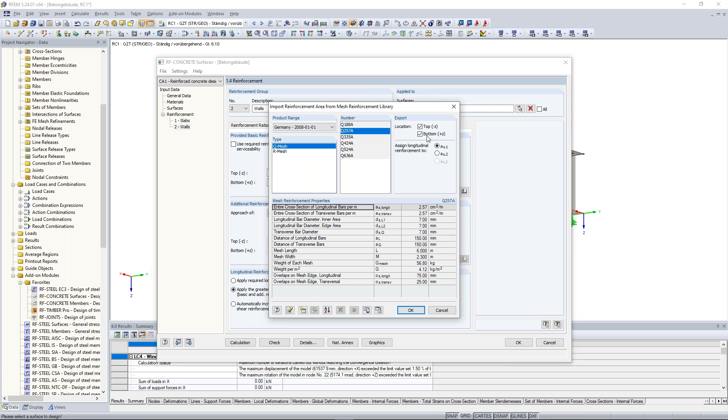And for that case, I choose one of our meshes. I choose here the Q257A, both locations. Okay.

Now I can jump to the last two registers. You can set some minimum reinforcement due to the Eurocode or due to your standard, also the design method, and so on. There are a lot of options you can consider for your design, for your proof of these concrete structures.

More you can find here in the handbook. When you press F1 or click help in the left corner, it will open this handbook, and you can find a lot of additional information about this add-on module, also about the theory. When I go here you'll find a lot of theoretical background. This is maybe interesting when you want to inform yourself, but for this easy example, not mandatory.

Good, then let's calculate this. This will take some time. So what we can see here now.

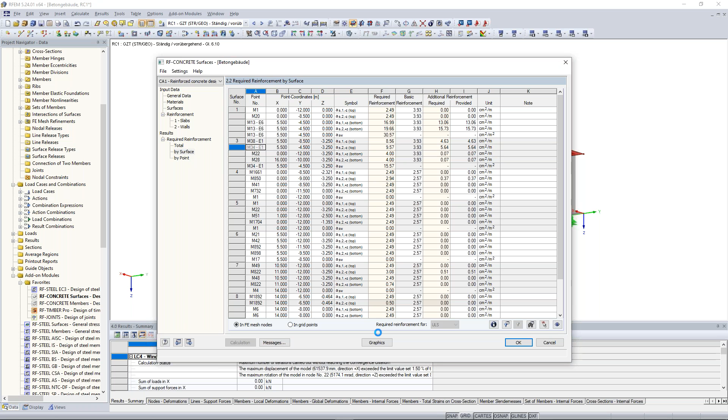First of all, here the required reinforcement - so what we have to put in our slabs, in our concrete slabs by surface. You get an overview here, but I would recommend using the graphics in order to see it better.

So what we can see here now - jump to the results, click here on show reinforcement direction. And here we can see the different directions. I choose here the panel, click here on OK.

So this is the required reinforcement - what you have to do, what you have to put there. You see this direction, the other direction, how you have to put your reinforcements.

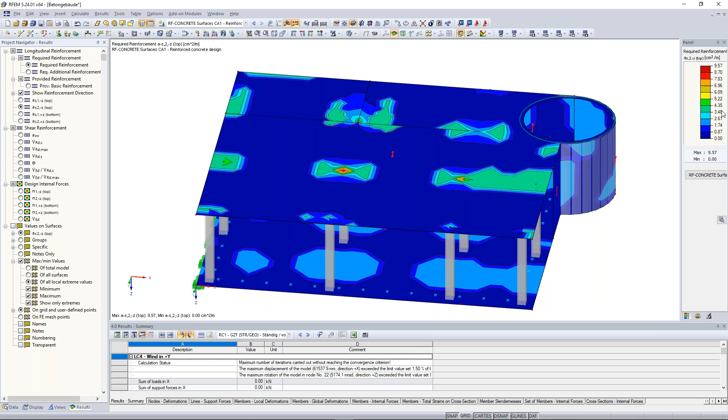When you want to have a better overview, I would recommend changing this panel and saying, okay, I want to consider my rebar, then fill it up, and then you see just the reinforcement you have to put additionally to your base reinforcement - as you can see here, especially near the columns, you have to put additional reinforcements.

Maybe you have to prove also a punching proof here, and so on. What we can see here also - the shear reinforcements.

When you want to print something to your printout report, just select the right slab, click here on visibility by selected objects. Then I would recommend deactivating show hidden objects in background, view in Z direction.

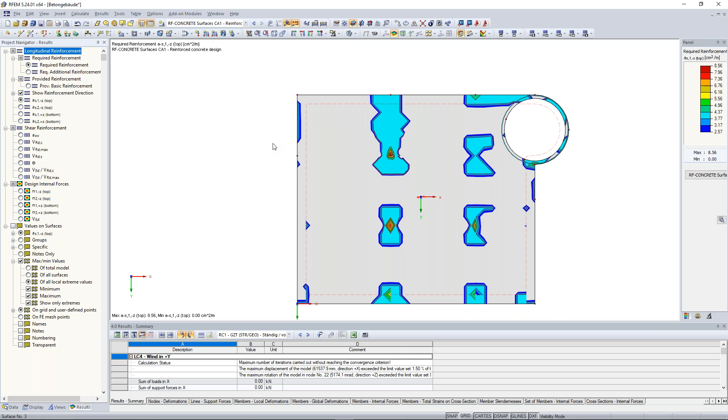Yeah, so much for the design of concrete surfaces. Now let's jump to the next part, the design of beams.

So for that, I changed the visibility mode. For designing beams, girders, columns, I can use RF Concrete Members.

So as you know, we modeled this downstand beam in the last online training. Important - this downstand beam was modeled as a rib, so the member type was rib. When I click here on that member, you see here the member type rib.

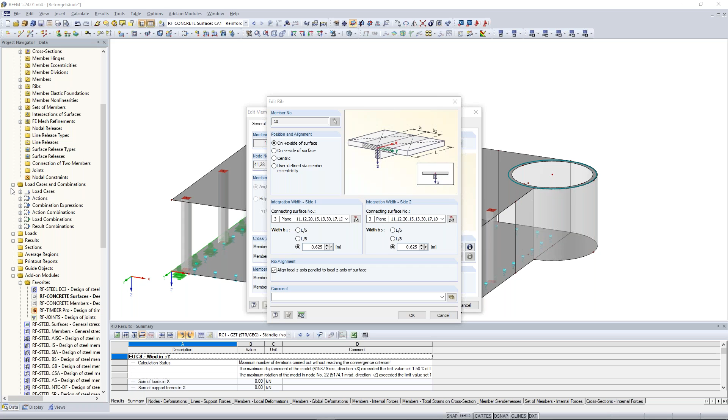And an important note on that point is that a rib considers this integration width, so this rib, this beam, gets additional forces from the surface. Yeah, this is important to know.

Good, let's design this. So click here on RF Concrete Members.

And here we have the same structure as in the RF concrete surface module before. We choose here the Eurocode. We are designing for this result combination.

Let's jump to the next part, materials. I think that's pretty clear. Cross sections - we can also optimize here these cross sections.

Ribs - here we can see the effective widths, also here in this bitmap. One important note: this rib is part of two members because we design here a set of members. Important, when you design a set of members, that you have the same effective widths. Otherwise you will get some problems, and this program will not calculate this.

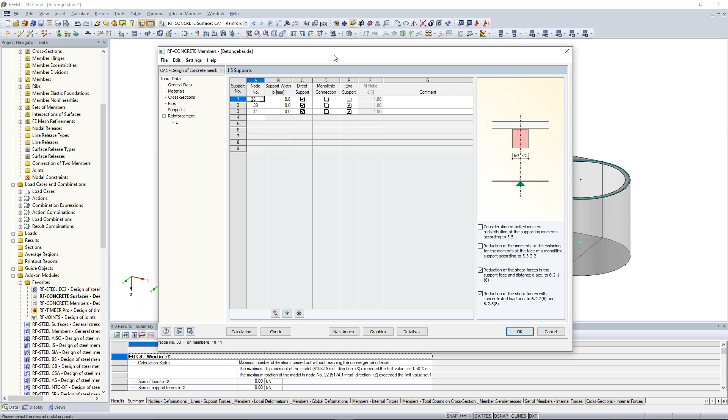So when I move this window a little bit lower, we can see this support number 38 is this wall support. It isn't an end support, but a direct support - we can also do a monolithic connection. Let's do that, and also for the other ones we do a monolithic connection.

So we have also the possibility to consider limited moment redistribution of the support moment. I think that's known from the concrete lectures of your study, or also from the Eurocode, and also a lot of other options.

Let's jump to the reinforcement part. Here we choose the description and downstand beam, and we choose here the set of member. It's already chosen, so let's delete here these members.

Which possible diameters do I want to have for my calculation? I choose here 16 millimeters and maybe also 25 millimeters. The maximum number of layers should be 1. The anchorage type should be straight, and curtail type should be - so we have no curtailment.

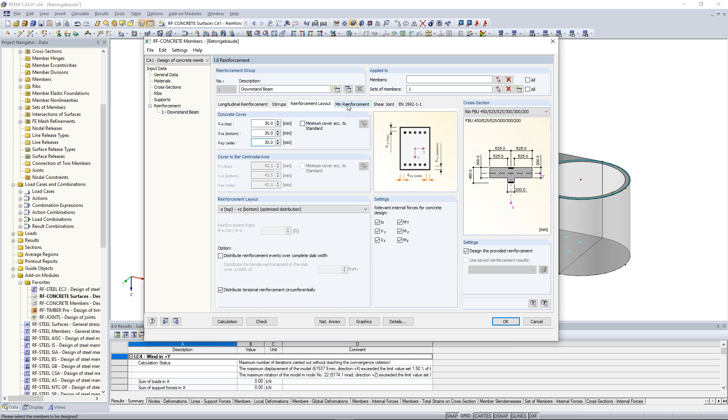Here we can also consider the concrete cover, but for this easy example I leave it like that, with 3 centimeters. Minimum reinforcement - I think that's clear. Here you can adjust some additional information also, and so on.

Good, now let's calculate that. This calculation will take some time.

As you can see here, the longitudinal reinforcements are listed on the top and on the bottom. Additionally, the torsional and shear reinforcements are displayed. Here you can see also some additional information about this proof, about this design of this slab.

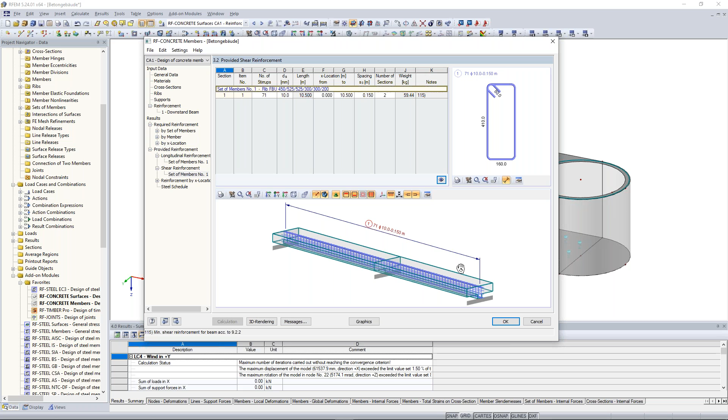Let's look at the provided reinforcement. Here we can see also a nice graphic of this structure, and also here the shear reinforcement. Also here the graphics, you can watch it also with the right effective width.

This was a short introduction to the design of this downstand beam. Maybe one short note: here you can see the required reinforcement, and here we can activate the provided reinforcement. You see the provided reinforcement is over the required reinforcement, and this is important.

Good, so last but not least, the design of these concrete structures, of these concrete columns. For that, go back to data, click here on RF concrete members. Important to know is that the Eurocode 2, so the design of concrete structures, provides 3 methods for the design of columns.

We have the simplified method based on nominal curvature, the general method based on nonlinear analysis including second order effects, and also the method based on nominal stiffness. For our example, we create a new case.

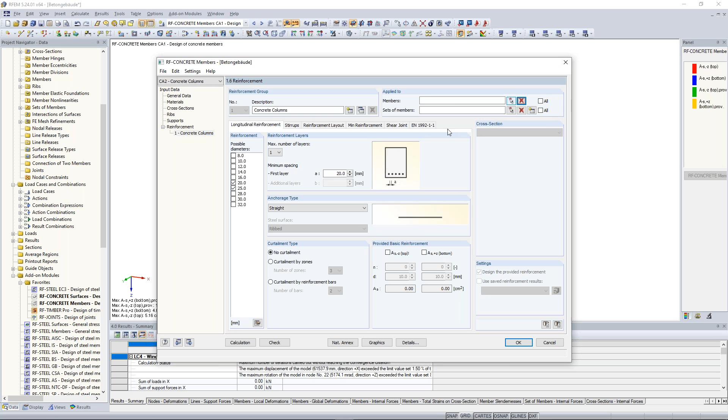I enter here the description of concrete columns and activate just the members which really include the concrete columns. So again here on view, I watch the concrete columns cross section, and I choose just these columns, draw a selection window, click on OK, and jump to the next register, stirrups.

Also here I define stirrup spacing. The reinforcement layout is in that case in corners, so I want to have my reinforcements in these corners. And then calculate this. And here we can see it's not possible to design result combinations for nonlinear calculation. So I have to remove it and do it for the normal load combinations. This will take some time, and after that we can watch the results.

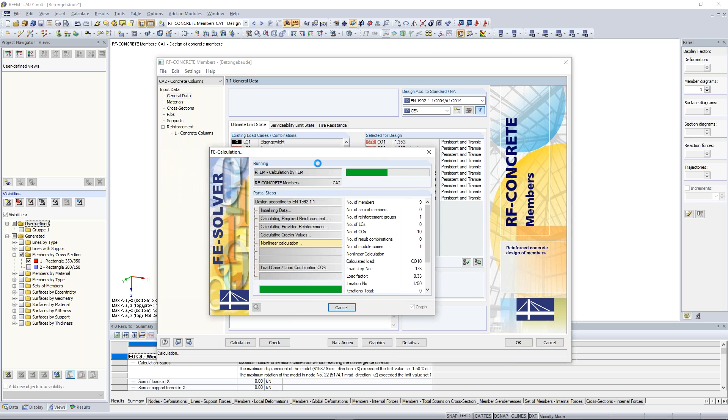I think I calculated too many load combinations, but I think we will have it in a few minutes. Sorry for that. Normally, the load combination with the most pressure loads is the load case which will be the most important to design. But now we have combination 9, so the last one will be combination 10, and after that we can watch the results.

Short hint: the nonlinear calculation will take a longer time than the normal calculation. But now I'm pretty sure we have it. If not, I cancel this and calculate it only for one load combination. Okay. I cancel this because this takes too much time. But it has already calculated for some points.

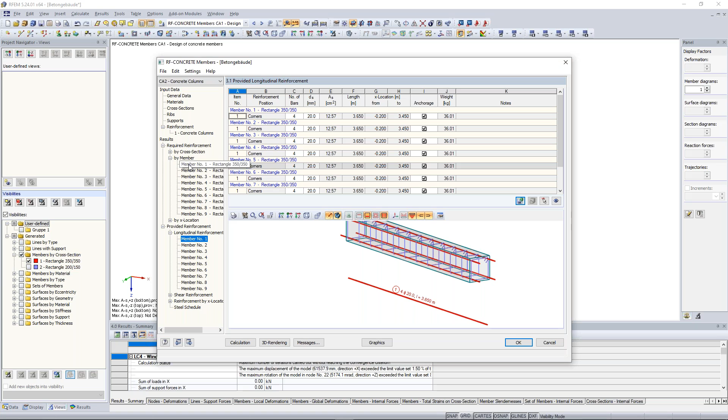And also here we can watch the reinforcements by graphic, and also what we have as provided reinforcement and as required. And the required is just the minimum reinforcement. Let's look at it here. So we cancel the visibility mode. We see here the different reinforcements.

Good. So this was the last part of this training. I hope you enjoyed that training and learned something. We gave you the basic knowledge of the design of easy structures in every engineering area. So we had timber structures, steel structures, and also concrete structures. And now I think as students, you are well prepared for further steps with RFEM, especially when you do some designs and so on.